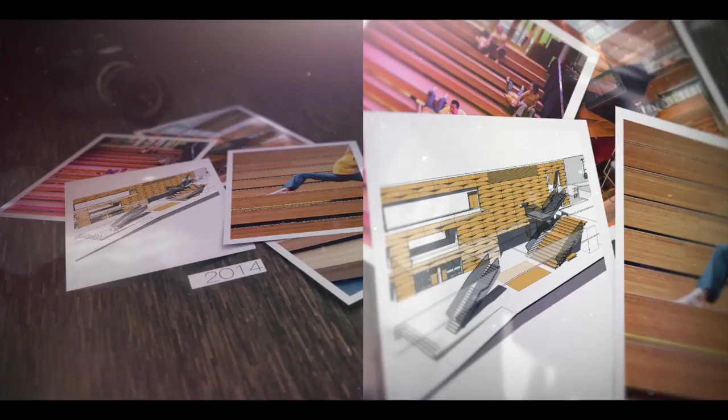Beauty of wood. This is an architectural category that recognizes extensive use of wood on the interior and/or exterior of a non-residential or multifamily structure. Consideration was given to the expression of modern architectural styles where wood products are used extensively in any variety of visible applications. The 2014 Beauty of Wood Design Award winner is Reed College Performing Arts Building, Portland, Oregon,

Opsis Architecture, Portland, Oregon. The Reed College Performing Arts Building consolidates theater, dance, and music programs into a vibrant, cross-disciplinary home for the arts. Wood is used to create unique and welcoming spaces. In the atrium lobby, a faceted 3-story Douglas fir wall crowned by a skylight provides an evolving show of shadow and light. In the studio theater, designers chose a red oak slat wall system made from a heritage tree that had fallen on the site during a storm.

Wood is also central to the building's performance. To achieve acoustic objectives, the atrium lobby and rehearsal hall include solid and perforated Douglas fir wall panels and slat ceiling systems, which diffuse and absorb sound. The use of wood also helped the college meet its target of gold certification under the Earth Advantage Green Building Program. Congratulations to the 2014 Beauty of Wood Design Award winner.

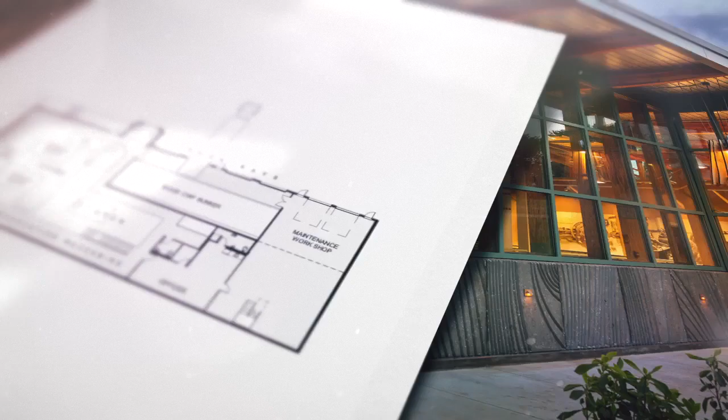Green building with wood. Wood is a good choice for green building because it grows naturally and is renewable, because wood products have less embodied energy, are responsible for less air and water pollution, and have a lighter carbon footprint than other materials, and because wood building systems can contribute to operational energy efficiency. Nominations in this architectural category were judged on the basis of showcasing how wood contributed to some or all of these principles.

The 2014 Green Building with Wood Design Award winner is Biomass Heating Plant, Hotchkiss School, Lakeville, Connecticut. Centerbrook Architects and Planners, Centerbrook, Connecticut. Faced with the replacement of an aging fuel oil heating plant, the school chose to build a LEED-certified biomass facility that burns wood chips from sustainably managed forests nearby.

Designated as a renewable fuel by the Intergovernmental Panel on Climate Change, wood chips are replacing about 150,000 gallons of oil each year, while cutting emissions by more than 90%. During the plant's first heating season, it saved the school more than $800,000 in fuel costs.

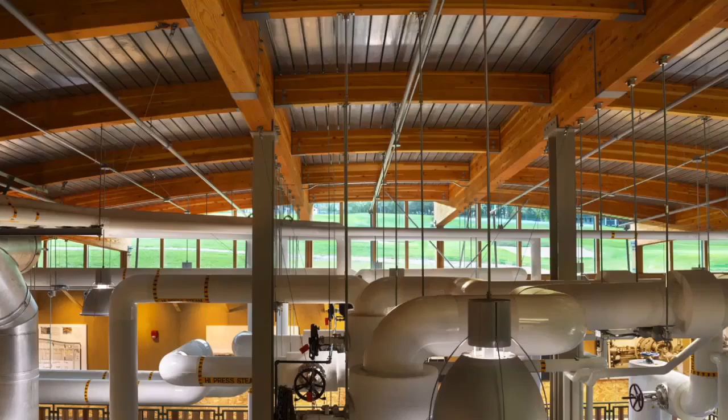Valued for its renewability and local abundance, wood was also used in the building's construction. Wall systems include glued laminated timber, laminated veneer lumber, parallel strand lumber, and Douglas fir interior framing. The roof features Glulam girders and beams with a metal deck. Interior walls include oriented strand board and wheat board, and railings are made from a variety of locally harvested species.

Aesthetically, the design creates an iconic presence while merging into its natural setting. Sited at the periphery of the school's property, the 16,500 square foot facility is capped by a rolling, vegetated roof that changes color with the season. Congratulations to the 2014 Green Building with Wood Design Award winner.

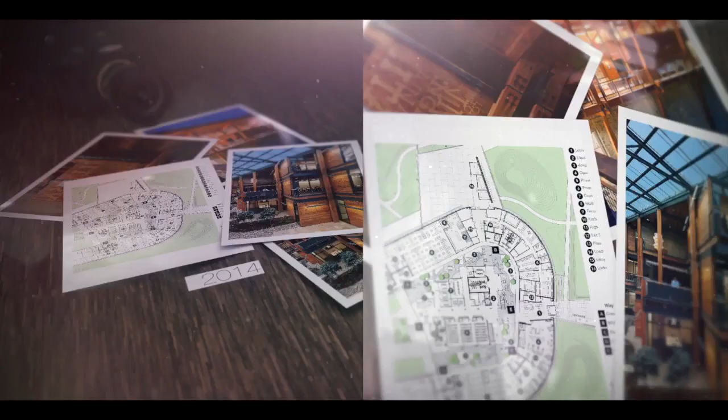Commercial wood design. This is an architectural category recognizing the creators of projects that push the limits of commercial wood design in offices, restaurants, stores, or industrial buildings. Projects of exceptional size or those showcasing unique wood applications were given special consideration.

The 2014 Commercial Wood Design Award winner is Federal Center South, Building 1202, Seattle, Washington. ZGF Architects. KPFF Consulting Engineers, Seattle, Washington. Federal Center South, Building 1202, is the Seattle District Headquarters for the U.S. Army Corps of Engineers. The LEED Gold project was partially funded through the GSA's Design Excellence program, which was established to procure the nation's best engineers and architects in order to achieve the most innovative and high-performance design in federal government buildings.

All of the timber used in the project was salvaged from a 1940s-era warehouse that previously occupied the site. A total of 200,000 board feet of heavy timber and 100,000 board feet of 2x6 tongue-and-groove roof decking. The heavy timber is featured fully exposed in the Central Commons, which includes conference rooms, libraries, restrooms, and gathering areas. Heavy timber was also used on the walking surfaces of interior pedestrian bridges and stairs, incorporated into the exterior entry canopy, and milled for use as hand railings and ceiling finishes, while reclaimed decking was also used for interior wall paneling. Congratulations to the 2014 Commercial Wood Design Award winners.

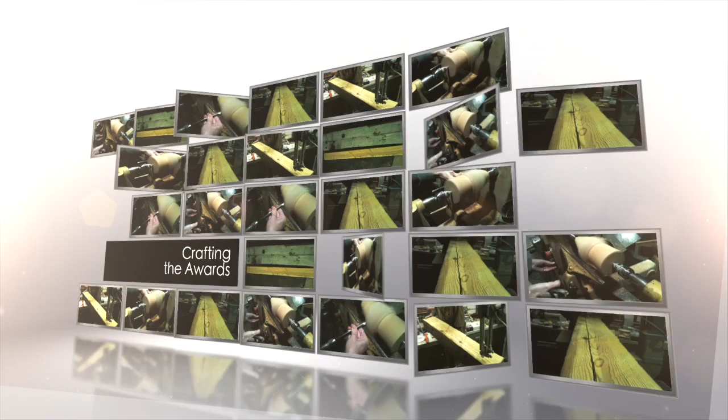In addition to today's recognition of their achievement, the 2014 U.S. Woodworks Wood Design Award winners will each receive a newly designed wood award. These awards were handcrafted by Matrenga Wood Designs in Nashville, Tennessee, from North American woods, heart pine, cherry, and curly maple.

Innovative wood engineering. This award recognizes the contribution of innovative engineering to a non-residential or multi-family building project. Special consideration was given to submissions that highlight wood solutions to challenging design requirements such as complicated architectural layout or unusually high wind or seismic loading.

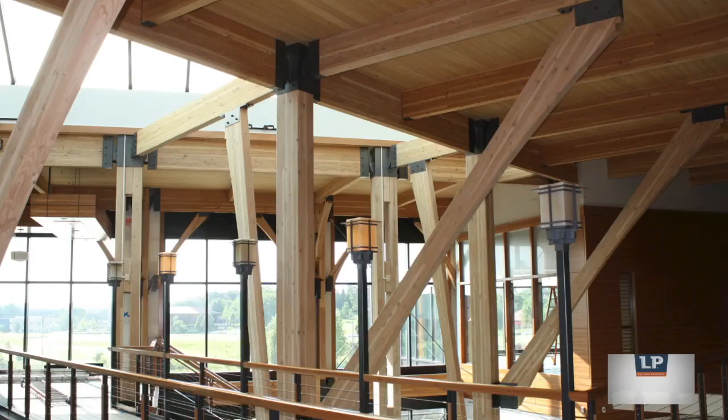The 2014 Innovative Wood Engineering Design Award winner is Promega Feynman Center, Madison, Wisconsin. Ewing Cole, Philadelphia, Pennsylvania. The Crossroads, a 52,000 square foot client and staff reception area, is part of the Promega Feynman Center, a 300,000 square foot Good Manufacturing Practices, or GMP, facility in Wisconsin. The structure has a complex footprint, forming a sinuous S-curve which wraps around one corner of the rectangular GMP facility.

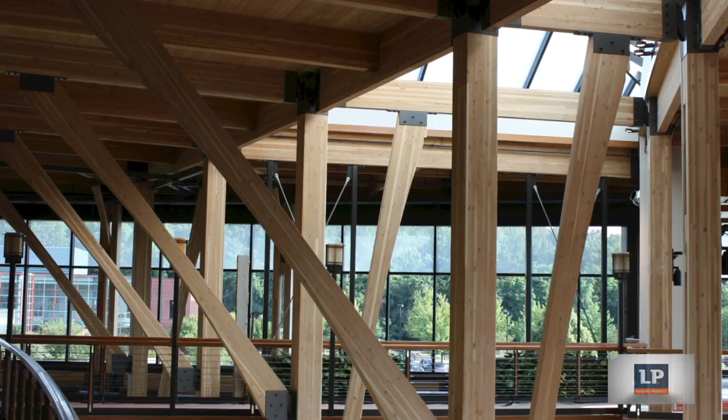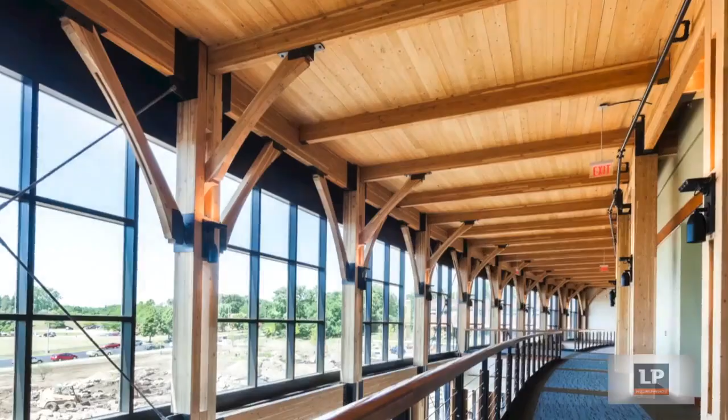The team was challenged to use a material that would perform well for the long-span deck needed to cover the curved roof. Cross-laminated timber, or CLT, provided the solution. However, with virtually no square angles in the structure, beam-to-column connections were a challenge. To avoid more than 100 different configurations, the engineer designed a steel pin connector that allows as much as 10 degrees rotation in either direction, providing the required swivel to fit nearly all of the connections.

Although CLT is relatively new to North America, this project earned local building department approval thanks in part to the new ANSI APA standard for performance rating cross-laminated timber. The design team discussed the standard with building officials and submitted engineering information under the alternate design section of the International Building Code. Congratulations to the 2014 Innovative Wood Engineering Award winner.

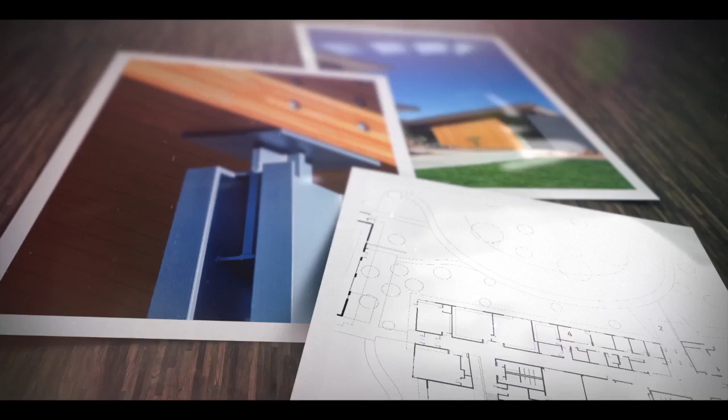Wood School Design. Open to architects and engineers, this category recognizes the use of wood in school construction. Special consideration was given to projects that utilize wood to create an enriching learning environment and which feature wood as the main structural material.

The 2014 Wood School Design Award winner is Cascades Academy of Central Oregon, Tumalo, Oregon; Henneberry Eddy Architects, Portland, Oregon. Nestled among junipers, ponderosa pines, and volcanic boulders, the Cascades Academy of Central Oregon is an independent school for pre-kindergarten through grade 12 students.

Exposed wood structure at select gathering spaces characterizes the school's focus on experiential learning in the natural environment. The building is clad in western red cedar, arranged in vertical sections separated by glazing to reflect the rhythm of scattered junipers and pines. Western hemlock, featured inside the building at ceilings, cable trays, and screen walls, creates a natural, healthy, and inspiring setting for learning.

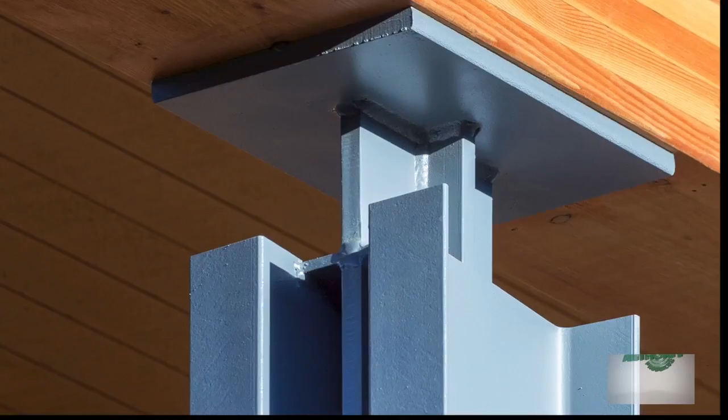Extensive use of wood allowed the design team to realize the project goals within the constraints of a limited budget and a challenging schedule. Specifically, the use of platform wood framing and pre-engineered wood trusses kept construction costs low. Congratulations to the 2014 Wood School Design Award winner.

Institutional wood design. The healing and stress-reducing properties of exposed wood are becoming increasingly well documented. This is an architectural award recognizing the benefits of wood in institutional applications such as hospitals, libraries, municipal buildings, and recreational facilities. Special consideration was given to projects that utilize wood to create a warm or healing environment, and which feature wood as the main structural material.

The 2014 Institutional Wood Design Award winner is James and Ann Robinson Nature Center, Columbia, Maryland; GWWO Architects, Baltimore, Maryland. The three-story Robinson Nature Center is both educational and interactive. The 26,000 square foot facility includes a 50-seat digital planetarium, as well as exhibits, classrooms, a multi-purpose auditorium, and offices.

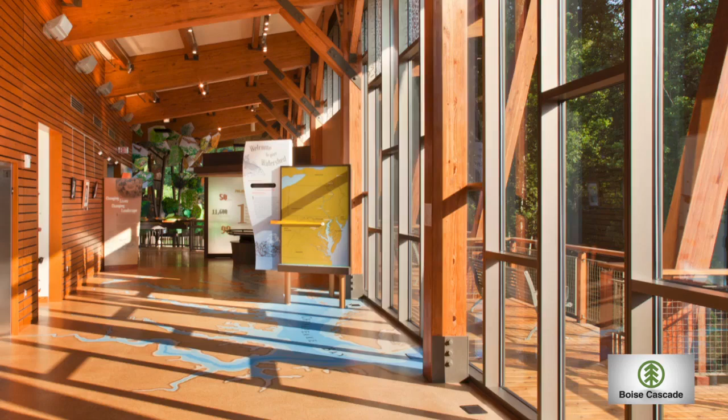The exterior cedar siding blends with the natural landscaping, both reinforcing the center's role of connecting visitors with nature and minimizing impact on the site. The roof system includes a tongue-and-groove wood deck, carried by timber purlins spanning exposed large Glulam girders in the main space. Inside, ash acoustical wall slats and oak flooring provide rich, warm tones.

The client's mission, to educate the public about environmental stewardship, made achieving LEED Platinum certification of paramount importance. 7 LEED points were gained by specifying wood that was FSC certified, low-emitting, recycled, and/or regionally produced. Congratulations to the 2014 Institutional Wood Design Award winner.

Traditional use of wood. This category recognizes the innovative use of wood from an architectural or engineering standpoint in buildings that traditionally feature wood in their design and construction. This includes, but is not limited to, projects such as wineries, churches, and outstructures. The 2014 Traditional Use of Wood Design Award winner is Muckleshoot Smokehouse, Auburn, Washington.

Mahlum Architects, Seattle, Washington. Muckleshoot Smokehouse in Washington State is a 16,600 square foot ceremonial longhouse. Dedicated to the practice of the smokehouse faith, the building includes a main ceremony space for 500 people, a smaller local room for more intimate services, and a dining hall. While the construction is highly reverential to its Salish heritage, the design is a modern interpretation.

Massive cedar columns and fir queen posts make up 19 identical structural bays and support fir log purlins along the length of the gable roof. Double rafters support tongue and groove roof decking, concealing fire sprinkler piping and lighting conduits. In consideration of the health of the elders, the traditional wood fires are enclosed, but the building envelope remains traditionally porous at the two ceremony spaces, clad only with cedar plank siding. Congratulations to the 2014 Traditional Use of Wood Design Award winner.

Juror's Choice Award. This project impressed the jury significantly in scale, scope, or social impact, making it deserving of recognition not necessarily outlined in other categories. The 2014 Juror's Choice Wood Design Award winner is Habiframe Tornado Storm Shelter, Nashville, Tennessee. Conestoga Rovers Associates, Birmingham, Alabama.

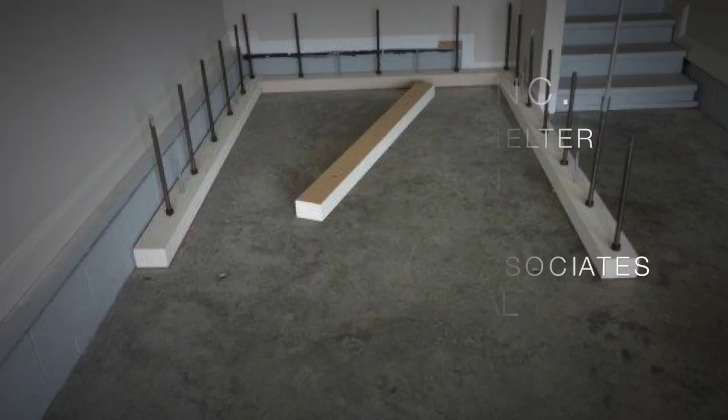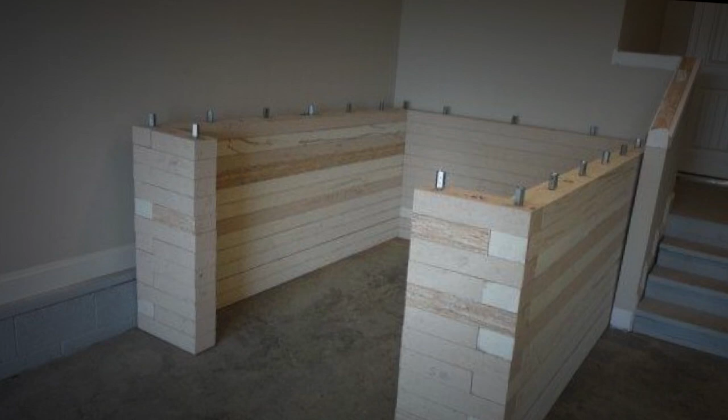The Habiframe Tornado Storm Shelter used existing products and technology to create a storm shelter that complies with the strict requirements of ICC 500, the 2008 standard developed by the International Code Council and National Storm Shelter Association. A structural preference for wood was driven by its strength, performance, and durability. Ease of construction was also a critical factor, as was the desire to design a shelter that could be taken apart and relocated. The structure is made from a laminated strand lumber and readily available connectors, screws, and tie rods.

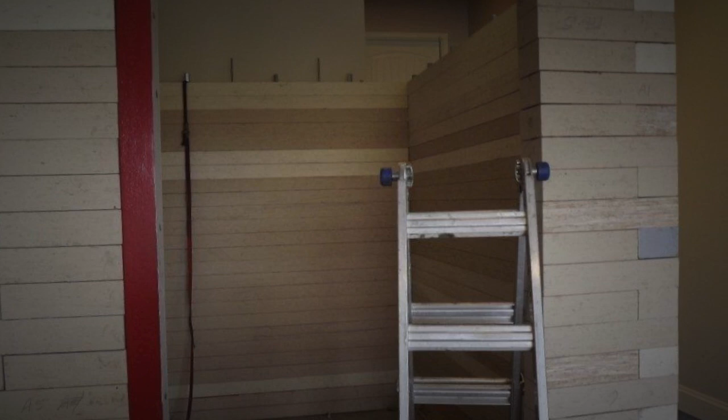The first challenge was meeting the missile criteria for wind-borne debris, which can only occur through physical testing. A 10 by 10 by 10 foot wall was constructed and tested at the Wind Science and Engineering Research Center at Texas Tech University. The wall system passed the testing protocol with little to no damage resulting from debris impact.

The second major challenge was load path continuity. The project design wind speed of 250 miles per hour provided a significant amount of horizontal and vertical load to be resisted. A large portion of engineering time was required to provide a path for the high loads to travel from the roof and walls around the openings and into the foundation. Congratulations to the 2014 Juror's Choice for Wood Design Award winner.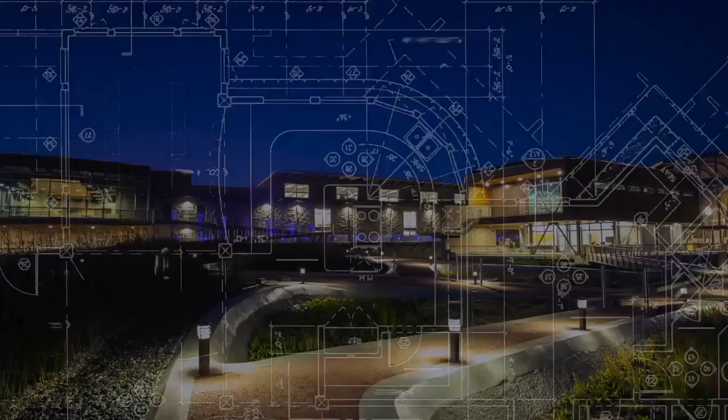The 2014 Regional Excellence in Wood Design Award winners. Regional Excellence, Southwest. Advanced Water Purification Facility, Oxnard, California. Main Street Architects and Planners, Ventura, California. The $58 million Advanced Water Purification Facility incorporates a visitor-friendly public education space and water resource learning environments.

Distinct from the site's other structures, the 11,600 square foot Science and Administration Center serves as a public entrance for tours of 5 separate facilities, as well as a walk-through tour of the site's interactive demonstration wetlands. A 2,000 square foot conference center on the second floor is the endpoint for tours, offering wide open views of both the constructed wetlands below and, further east, the natural Ormond Beach wetlands.

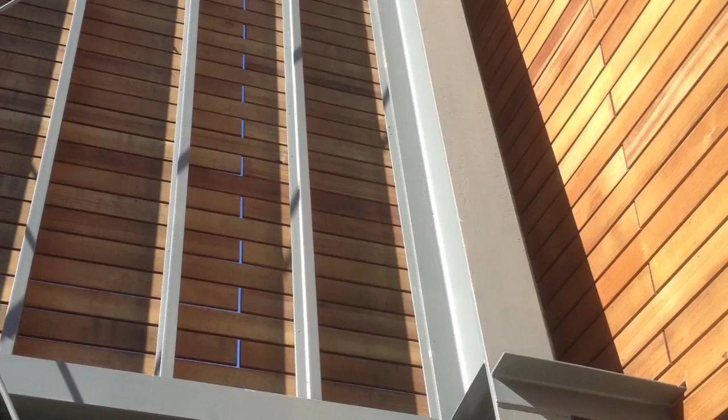Western red cedar was used for the exterior rain screen assembly and entry portal, as well as an interior finish on walls, ceilings, and soffits, providing a warm and harmonizing counterpoint to the site's industrial buildings. Wood brings a human scale to the project and provides texture. The design team chose wood, a natural, renewable resource, as an appropriate backdrop for visitors learning about the importance of water conservation and resource recycling. Congratulations to the 2014 Regional Excellence in Wood Design Award winner.

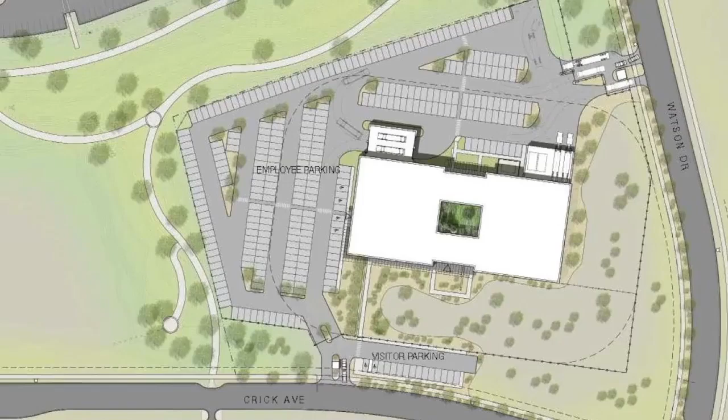Regional Excellence, South Central. GSA Office Building, Albuquerque, New Mexico. Page Sutherland Page, LLP, Austin, Texas. Situated on a broad mesa in New Mexico, the new General Services Administration office building, shared by federal, state, and local agencies, is constructed from masonry in order to take advantage of the high diurnal temperature swings of the desert.

However, the use of such a visually heavy enclosure system necessitated the introduction of a lighter material. Western red cedar was used to shade the windows from the desert sun and provide visual interest across the long building facades. The trellis provides shade for visitors and frames the mountain views. In the courtyard, wood was selected for its stress-reducing qualities. The building houses immigration facilities where both immigrants and officers face challenging situations. The courtyard is located in the center of the structure and provides a shaded, protected oasis where visitors and employees can relax throughout the day.

A series of cable-supported transverse wood slats that are variably spaced provide sun shading only where necessary, along the east, west, and north courtyard facades. The GSA office building achieved LEED Silver certification. Congratulations to the 2014 Regional Excellence in Wood Design Award winner.

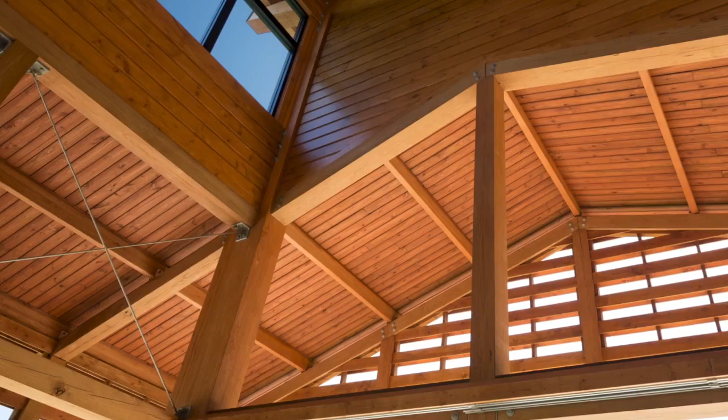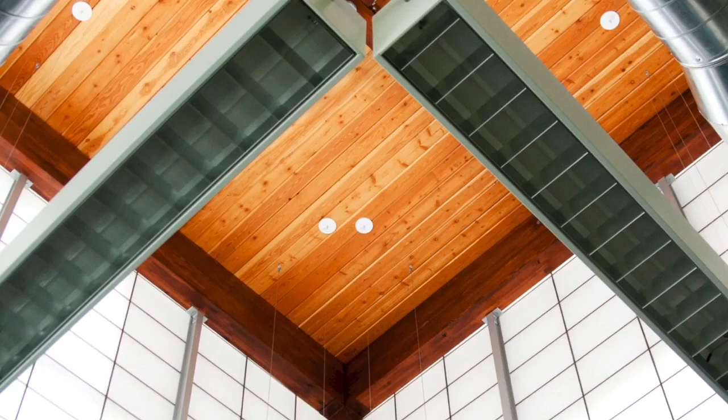Standing and running trim, casework, and interior doors and frames are also wood, making this a comfortable living environment for on-duty firefighters. Congratulations to the 2014 Regional Excellence in Wood Design Award winner. Congratulations to all the 2014 U.S. WoodWorks Wood Design Award winners.